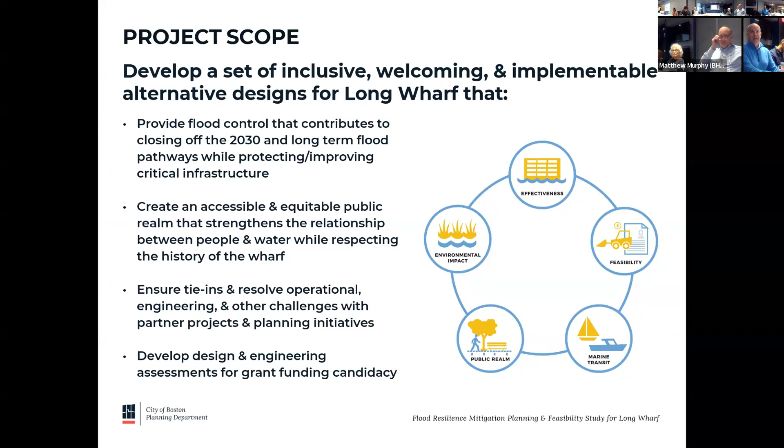And also, what role does our property play in a district scale line of defense? So if we're looking at a district scale flood barrier, where does it occur in our property and when does it get built out?

Our project area is strictly within our property area. To the north, connecting to Columbus Park, and to the south to Old Atlantic Avenue and the aquarium. It also includes the water sheet and all the water transportation infrastructure at Long Wharf.

We're responding to the flood risks, the flood maps. Downtown Boston was vulnerable to near-term flooding, existing flooding and near-term flooding, not just the 2070 long-term flooding risks.

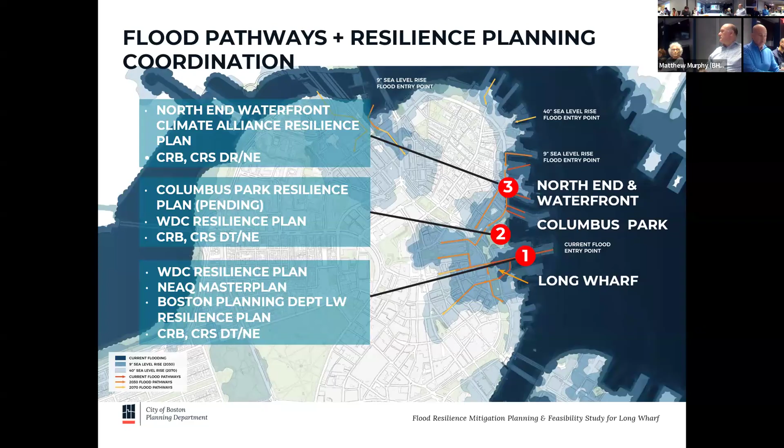We've coordinated our project with the Wharf District Council Resilience Plan, the upcoming Columbus Park Resilience Study, and the North End Climate Alliance Study—all these efforts underway to look at the modeling and determine how high we need to build and what level of design we want to utilize.

This is just a scale of how high we need to build. I'm going to go through a bunch of slides about resilient infrastructure and design. We use John Hancock as our scale, since his counting room was out at Long Wharf in the chart house, and he was about 6 feet tall.

You may recall the floods from 2018—that was about a 1 foot flood depth based on the existing grade. For sunny day high tide, at minimum we want to redesign Harbor Walk to be dry in the future during sunny day high tides, which is about 3 feet, and king tides, which is about 4.5 feet from existing grade. The storm surge—keeping the Atlantic out of downtown—would need to be built up to 6.5 feet above grade. So this is a significant change in elevation. How do we build this to protect the city from flooding but also maintain our connectivity to the water's edge?

Our plan is not just protecting what's out there, but to improve the experience of the public out at Long Wharf. And we've been very busy.

Can you go back to that? I just have a question. Are you saying the one that's next to John Hancock, that's 15 feet?

That's the elevation above. The elevation at Old Atlantic Avenue is like 8.5, so we have to go up about 6 feet. This is the North American Vertical Datum measurement, so it's not 15 feet from grade, it's 6.5 feet to get to an elevation of 15. You'll see elevation 15, elevation 12.8 on the designs I'm going to run through.

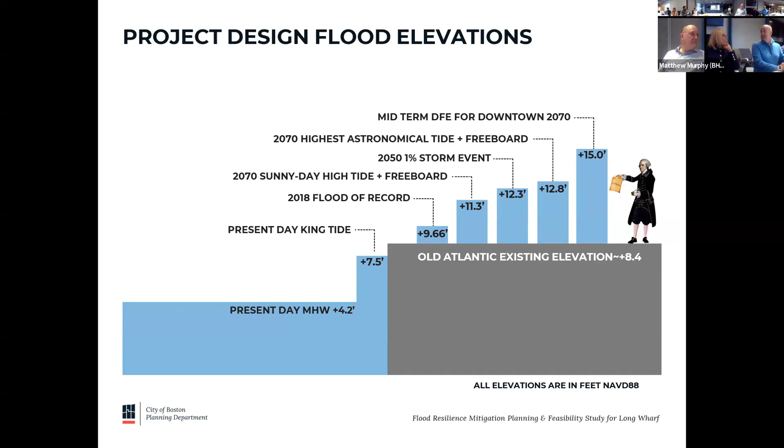And just keep in mind that we're talking a range from 4 feet for 2030 sea level rise projections to the longer term 2070 sea level rise projections—we need to build to about 6.5 feet higher than what's there now.

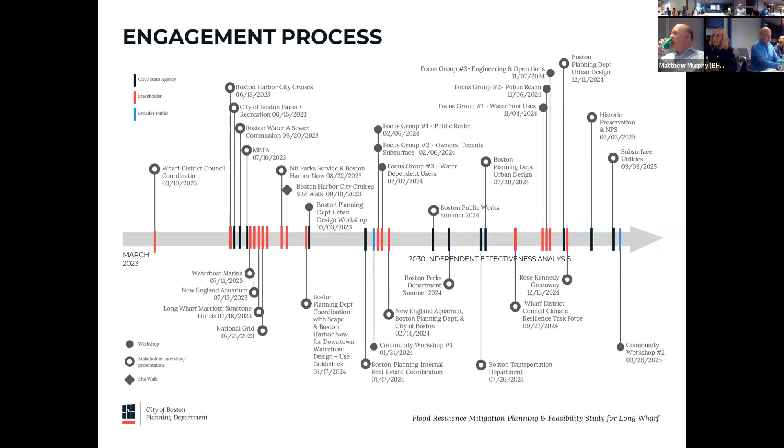Thank you. Our effort's been underway for about a year, 2 years now. We've been meeting with stakeholders, tenants, the MBTA, National Park Service. We've hosted 2 sessions of focus groups and 2 public webinars just to solicit feedback.

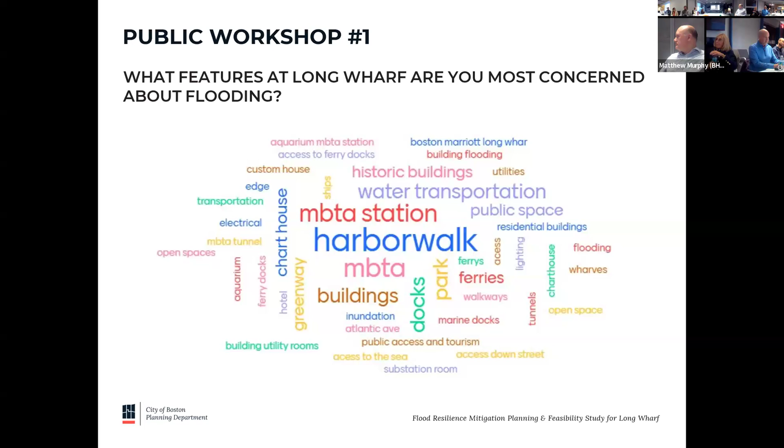In our first public workshop, we posed a question of what are people concerned about for flooding, and Harbor Walk was top on the list. The MBTA, Blue Line Station, water transportation services, the buildings, the historic buildings—numerous things, but this was just to scale for what people responded.

And then, what features would people like to see improved as part of our resilience roadmap—it was raising Harbor Walk, elevating it, shade during the summer months, shade structures, more open space, expanded ferry service, green space, green infrastructure, more public bathrooms. So we picked up on all this input and guidance and integrated it into our project design.

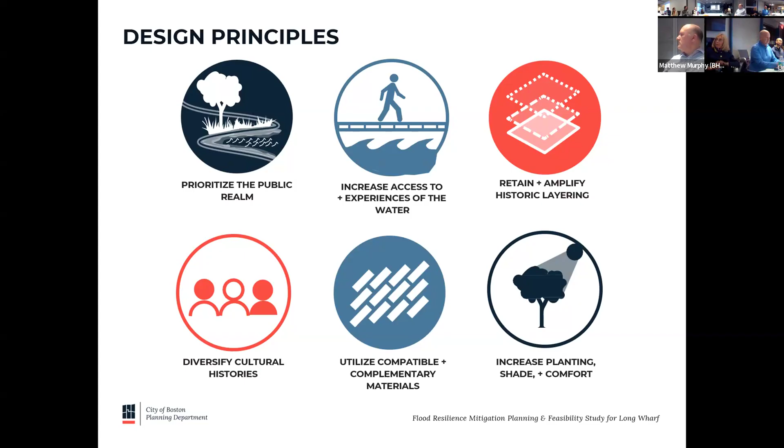Our design principles prioritize the public realm—not just protecting what's out there, but expanding it, increasing access to the water's edge, amplifying the historic layering, the National Register protected buildings, diversifying cultural histories, and utilizing compatible materials. The brick, the granite, the light fixtures—we're not looking to change dramatically the built environment, just to expand it, and increase planting, trees, shade, and comfort for the public.

So our roadmap for 2070 - the city did coastal resilience solutions for downtown North End back in 2020, and we had two alignments that we analyzed. The preferred alignment, option 2, was to build elevations along all the contours of the piers and wharfs. Falling back due to limitations of funding, permitting, and controlling rights of way, we have alternative number 1 that pulls back and allows the wharves and piers to be independently protected, but not part of a district scale line of defense, or possibly floodable.

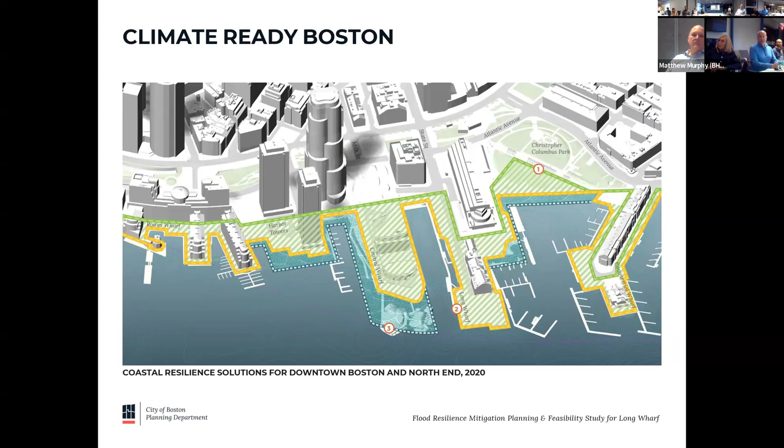That's one of our recommendations for Long Wharf, is that it can flood with coastal storms in the future, but would remain dry during astronomical high tides. So we have two designs that will be fully studied. We're not looking to reach consensus on either of these two - we're fully analyzing, providing the design, the engineering, the cost estimates. I don't think we're at the point now of making a decision since we don't have funding.

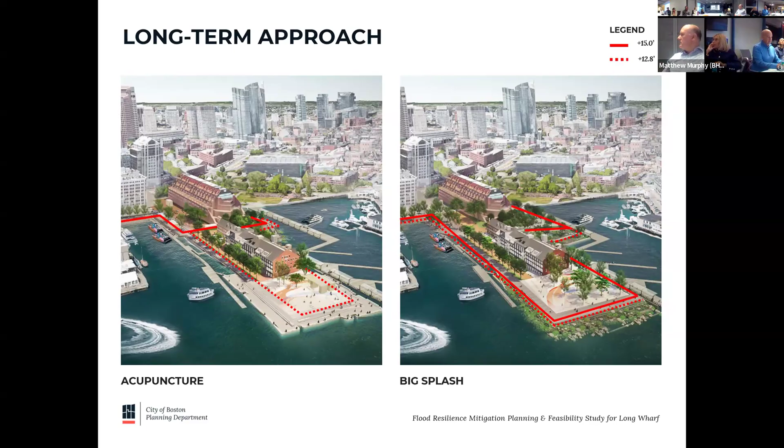We are designing our subsurface infrastructure to accommodate either of these approaches with the weight bearing load of either recommendation. So the two designs are: acupuncture, which has the main line of defense in that solid red line closer to the Marriott, and the big splash, which has that elevated 6.5 foot elevation change around the entire contours of Long Wharf.

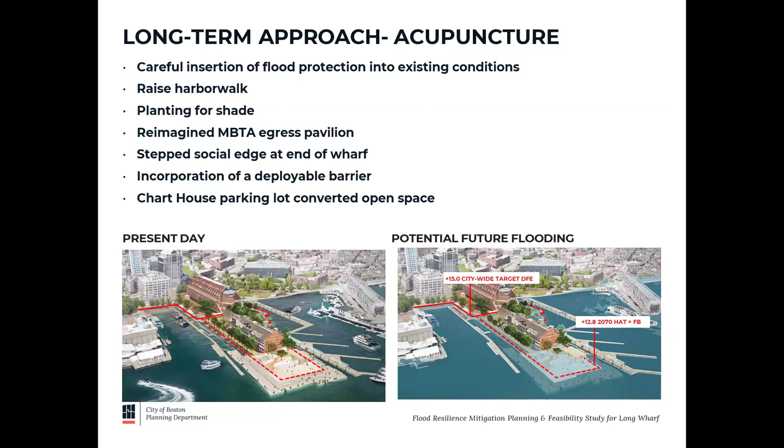Acupuncture is careful insertion of flood protection into existing conditions, raising the Harbor Walk. At a minimum, we want to elevate Harbor Walk to 12.8, which is about 4.5 feet, to put in more planting, to improve the MBTA egress pavilion out at the end of the wharf, to redesign it to be resilient, a stepped social edge out at the end of the wharf, incorporating a deployable flood barrier.

Our main line of defense is inbound of the chart house and would rely on a gate that would close at State Street. The gate would only close ahead of a storm, but that would be part of the district scale line of defense. And the chart house parking lot would be converted to open space, green space.

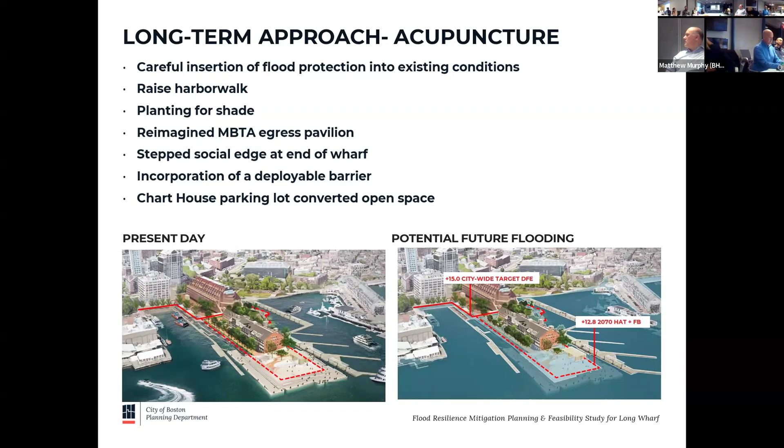As you can see, the image on the right shows areas that would flood with a coastal storm. We have to ensure that everything seaward of the higher elevation is retrofitted and adapted to accommodate periodic flooding in the future. This is a bird's eye view - the solid red line is where the higher line of defense, that elevation of 15, is located, and the dashed line is the elevated Harbor Walk.

In the near term to midterm, that elevated harbor walk will protect flooding for all of the wharf. But in the long term, the storm surge barrier is inbound of the chart house. So utilizing features such as aquarium glass, deployable gates, stepped plazas, ADA accessible ramp systems, raised berms, and landscaping.

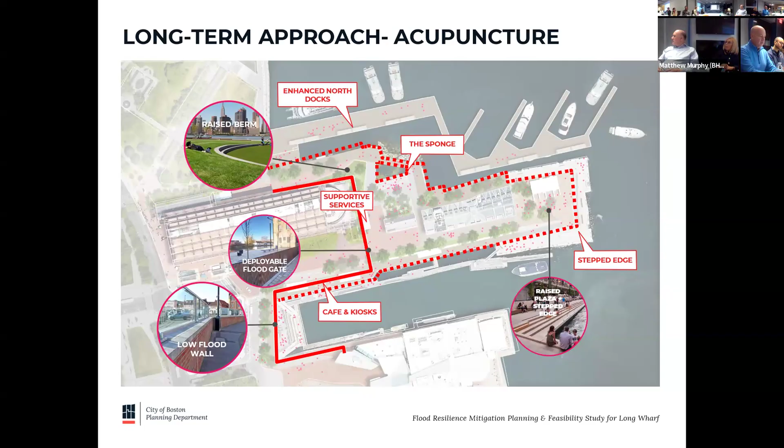We would consider that in either of these opportunities, and I'll talk a little bit about that later in the presentation as to why, and then converting the chart house parking lot to open space.

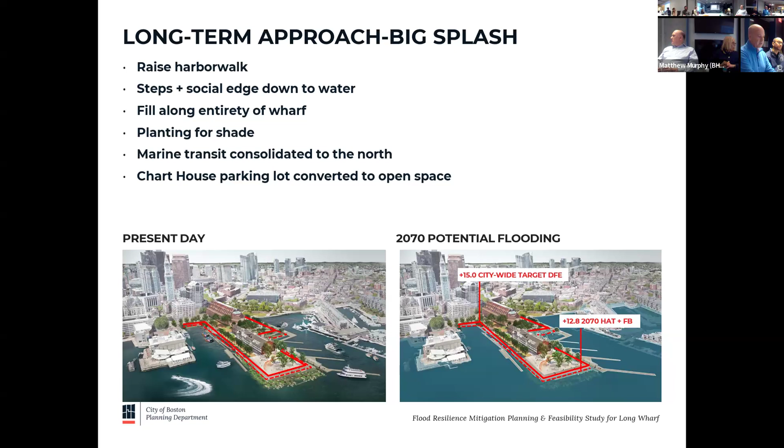This shows that the full line of defense, that elevation of 15, goes all along the contours of the wharf, protecting everything, but also represents a significant height change, which pushes us to do some dramatic landfilling and alterations. It would certainly alter the experience of the custom house block building, in that their first floor would now be sort of an English basement, below grade, and their second floor would be the entrance of the building.

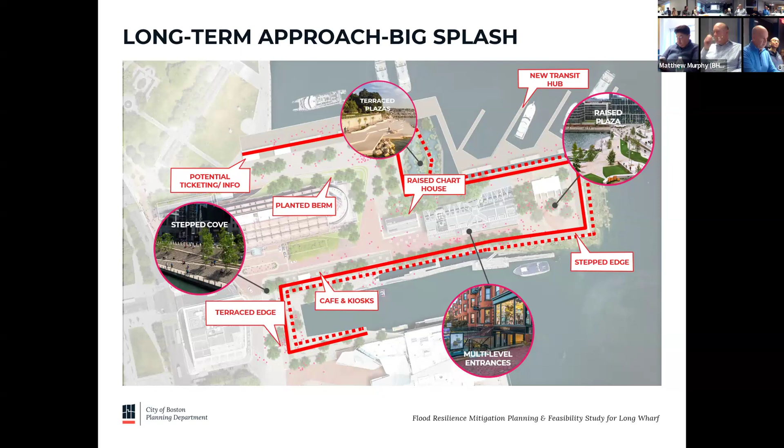So a lot of adaptation would need to occur for that structure and others. We're also going to provide guidance on how to adapt and retrofit all the buildings that could be floodable, with stop logs, gates, and other things, elevating mechanicals, to ensure those buildings can be protected.

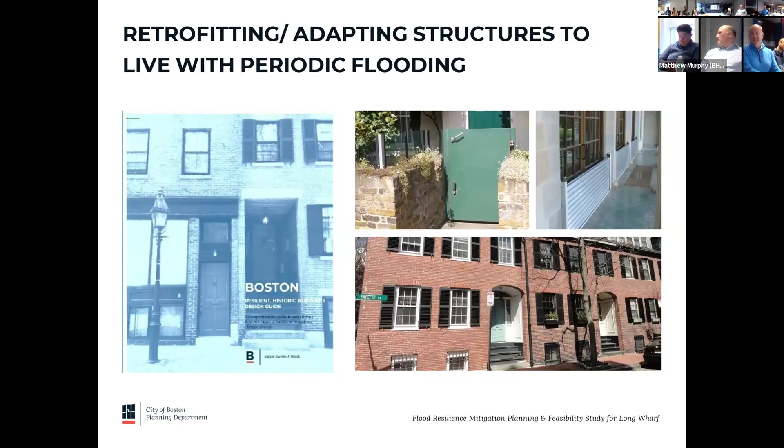We're also proposing, as a bold action item, to do an acquisition of the chart house restaurant and convert it into a public facility - possibly a gateway to the Harbor Islands, a location for office space, storage, and ticketing for the water transportation providers. We don't have the money to do that, but that is our bold item - to acquire it, but also elevate it 8 feet so it's protected in the future.

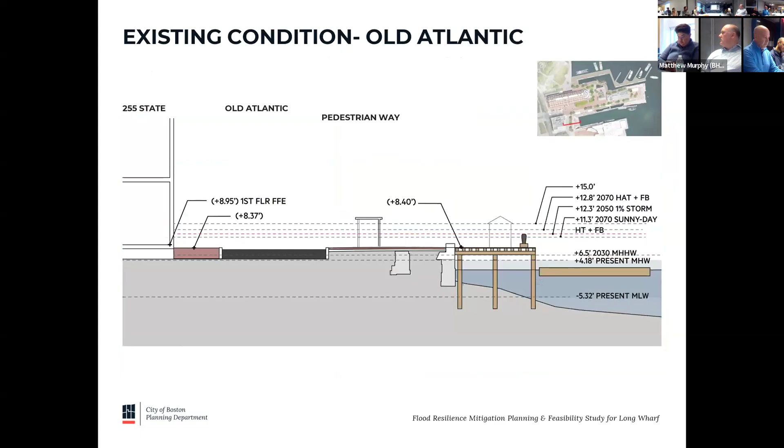So this is the existing grade, and this is how high we would need to build to address that acupuncture design, which would get to an elevation of 15. It would elevate the pier, assuming the water transportation service is still occurring from this location, elevate the walkway, and then you would have ramps and steps down to Old Atlantic Avenue, which would remain at grade.

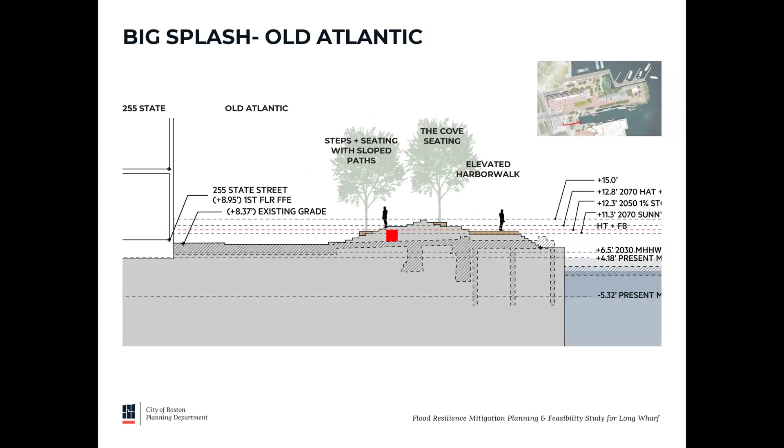Big Splash is more dramatic in that we're elevating the entire street to limit or minimize the amount of elevation that would have to occur at the water's edge, or just have less of a transition. An elevated berm, elevated walkway. It suggests filling in some of the cove to have more space for the public.

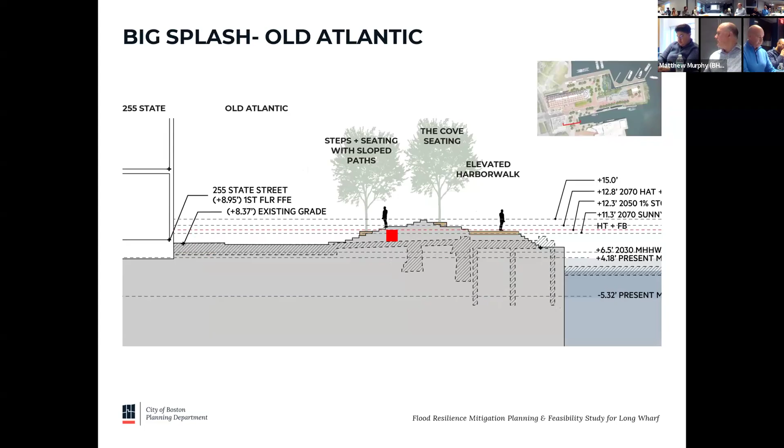I think that was one of the comments we heard, is where does the public convene, particularly during the summers? If we're putting in the elevation changes, are we losing programmable and usable open space? So there's an opportunity to bring in more landscaping, but also more areas for the public to use.

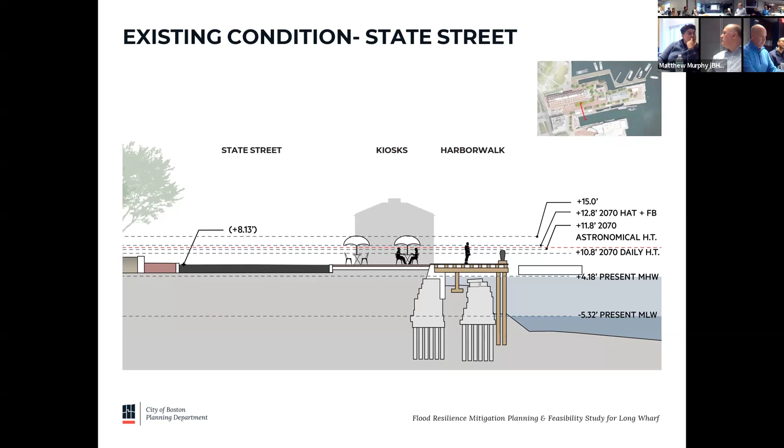State Street, so this is looking east down State Street towards the Compass Rose, and you'll see the water transportation facilities, Boston City Cruises, existing grade. This is how high we need to build for acupuncture, so hitting that 12.8 elevation to ensure that Harbor Walk is dry during astronomical high tides.

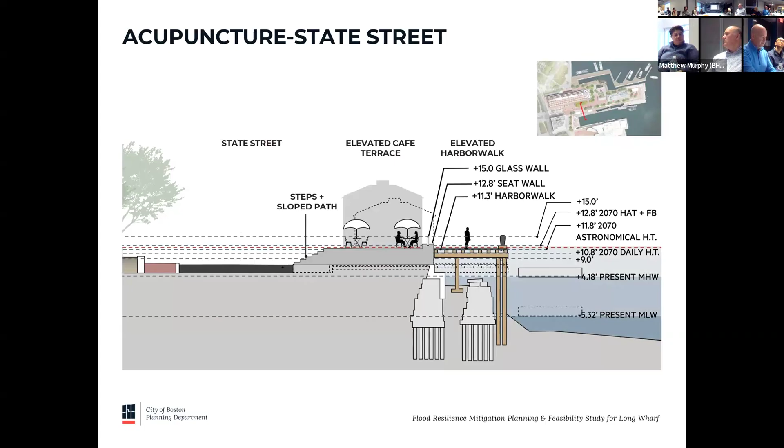So, not a significant transition from grade. And then Big Splash State Street would be filling State Street all the way to sort of the facade of Marriott, or at least to that area.

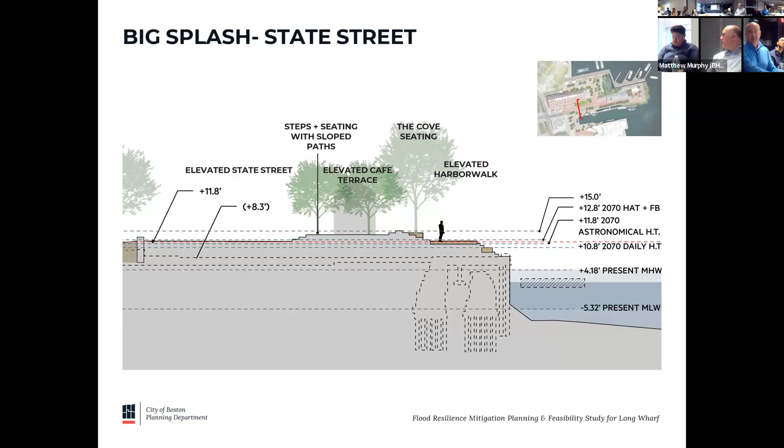So just showing you the transition between the two. Elevating the street comes with challenges such as, do we have to elevate all the utilities that are underneath the street? So these are things that we're looking at.

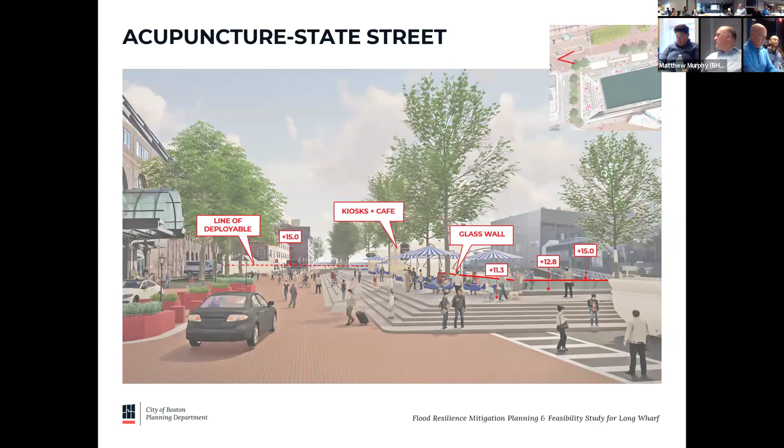So this just shows you the deployable, the elevation of 15. So that deployable gate would be about 6.5 feet above grade. And then just the various elevations of hitting our target goals. The big splash would be hitting that elevation of 15, so 6.5 feet above grade.

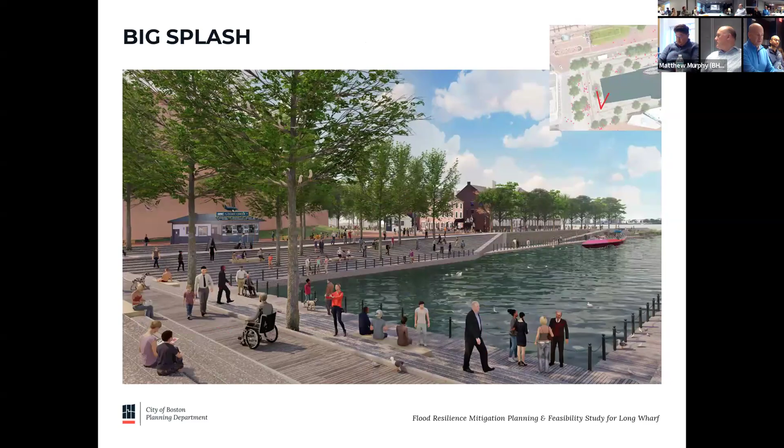And this just shows you how the elevated structures would accommodate a storm surge. This is during regular conditions, and then during a storm surge, this is how the project would accommodate that tidal flooding to hold the ocean back from downtown.

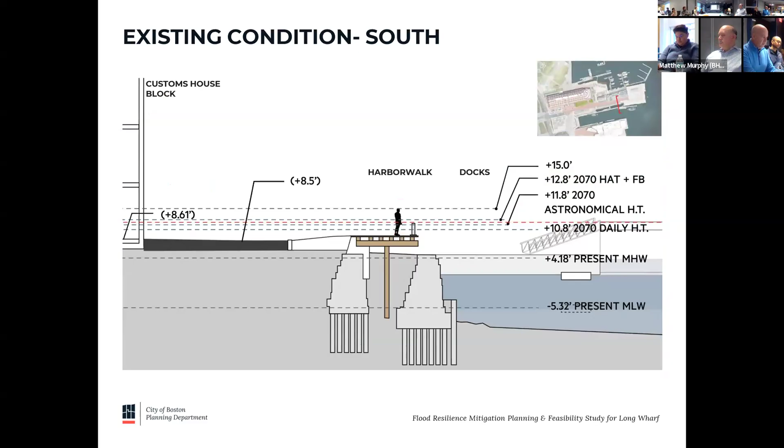And then moving further east on the south side of Harbor Walk, this is the existing conditions. And for acupuncture, this is how high we would need to go. We have enough room to build in a landscape slope, trees that are tolerant to saltwater inundation.

So having your elevated harbor walk so you still feel connected to the water's edge, but State Street at its current elevation.

Big splash, we're elevating the street so that you don't have that dramatic change to a harbor walk, that the roadway is more connected to the water's edge. The elevation changes and it's dramatic.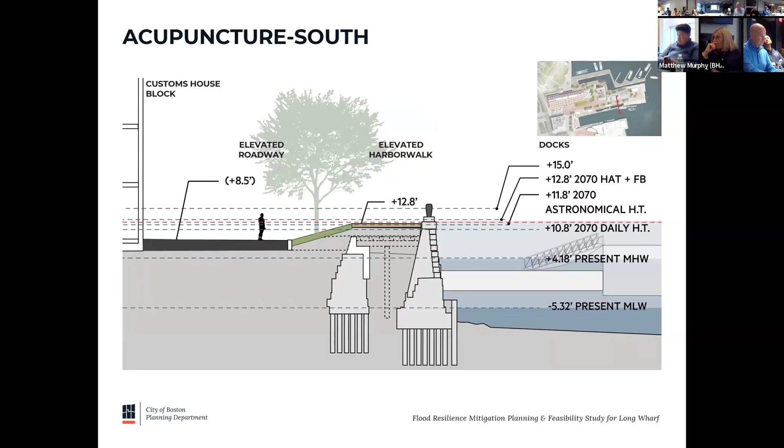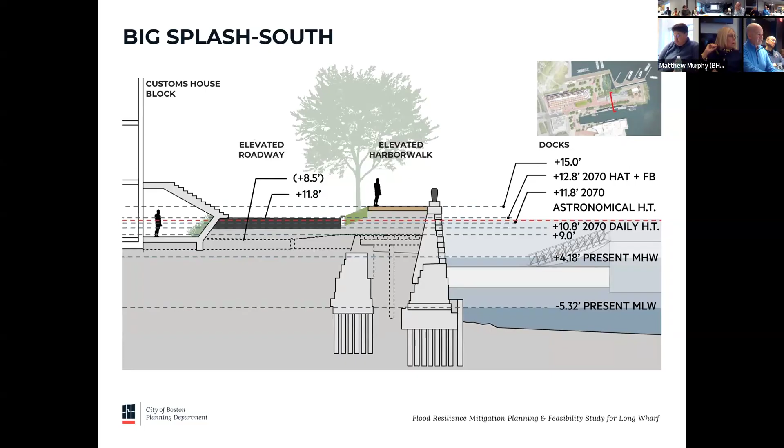But if you look to the left, you have the Custom House block building. This is current grade, the first floor you can access from the street. In this design, you actually can access the first floor or the second floor through stairs up or down, almost like an English basement. When you walk down Newbury Street, you'll see examples of the entryway that's at a lower level than the street.

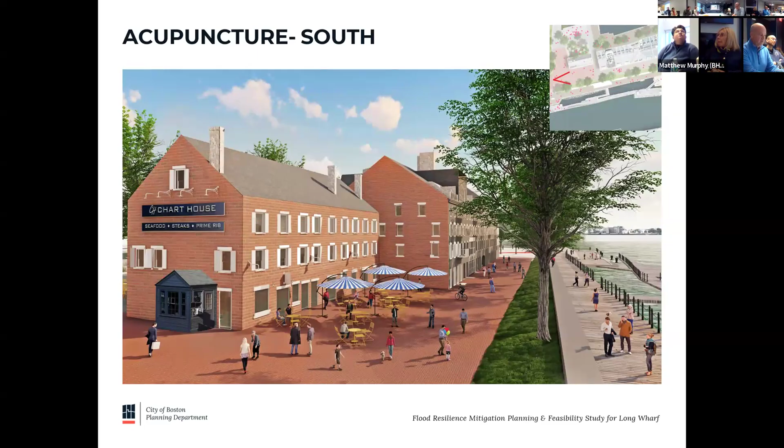This is just an image of acupuncture on the south. We have the flood barrier just on the land side of Harbor Walk to the right, and then a vegetated landscape berm where you can put in trees, and then maintaining State Street in its current form and program with the outdoor seating for the chart house.

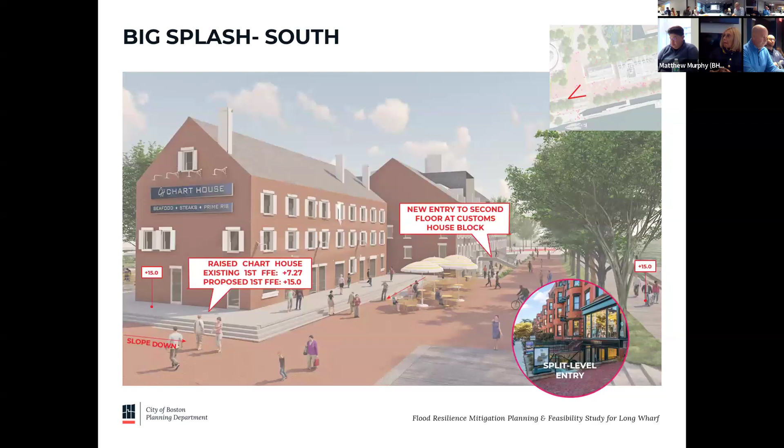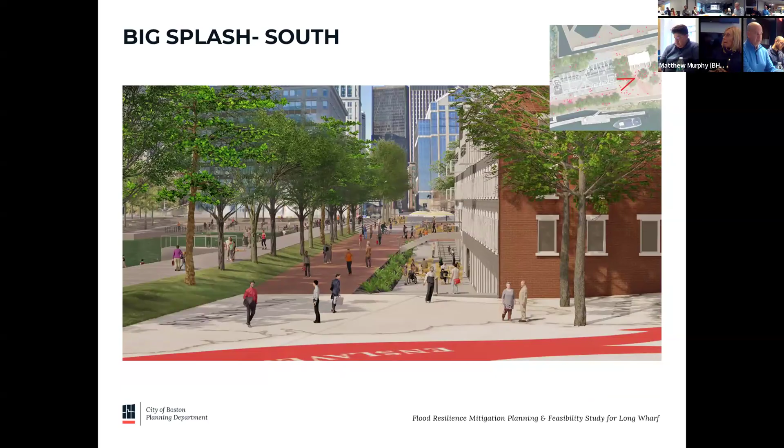And then, big splash — these are the elevations. This is with an elevated chart house, an elevated State Street, and the entrance to the Custom House block building would be below the first floor, with a stairway up to the second floor. This is looking west down State Street, with the Custom House block building on your right. This shows the conditions and how we're able to integrate this elevation change with minimal disruption to people's ability to see and connect to the waterfront.

And then out at the water's edge, we have a terraced elevated harbor walk, so it's dry during astronomical high tides in the future, modifying the MBTA egress building, that pavilion.

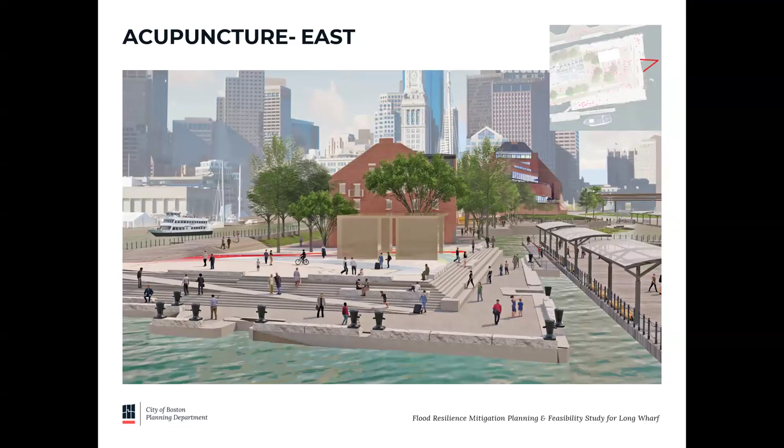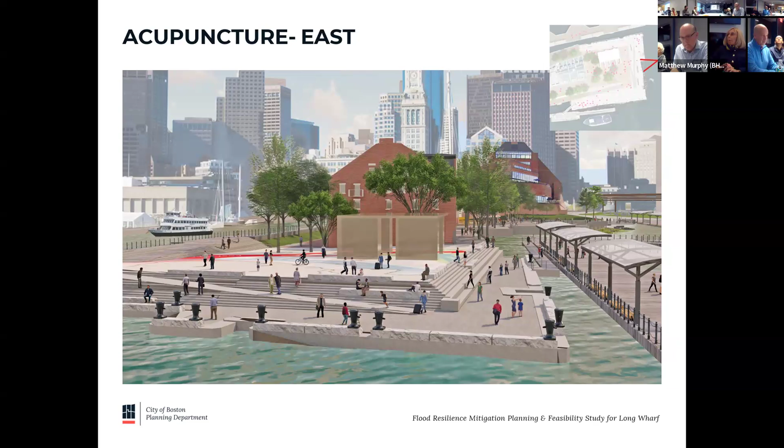Thank you, Rich. So this is the acupuncture approach — this would allow Long Wharf to be floodable during storm surge, but it would remain dry during sunny day high tides and astronomical high tides in the future. So this shows you how it functions. The buildings would have to be individually retrofitted and adapted. During coastal storms, you typically are not out at the water's edge, so the shoreline would be vacated by design. The deployable system would cut off people from their ability to access the water's edge, but this would just be during a coastal storm scenario.

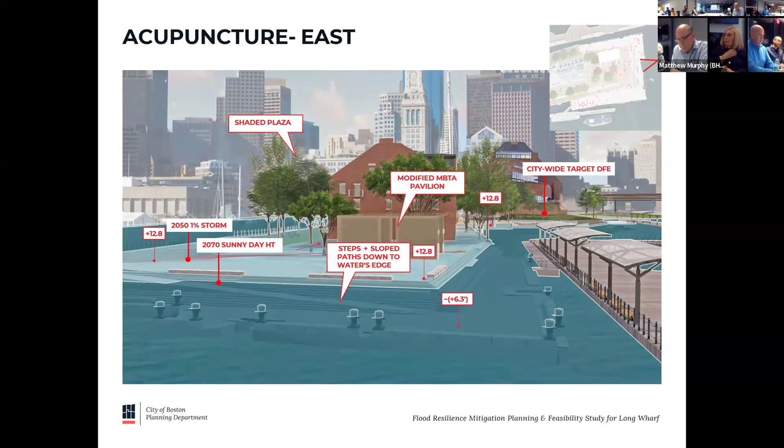For Big Splash, we're elevating everything to an elevation of 15, about 6.5 feet above grade, elevating the MBTA station, putting in a terrace edge on the eastern side of Long Wharf, possibly with nature-based features to add more green space and nature-based opportunities. This shows you how that design flood elevation would function during a coastal storm — the wharf would remain dry.

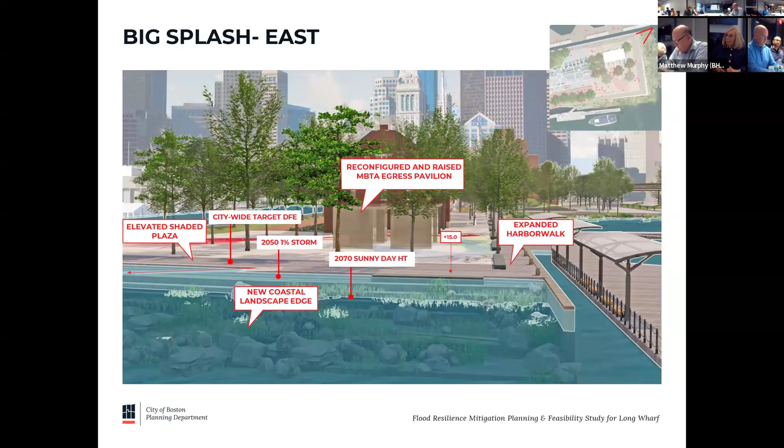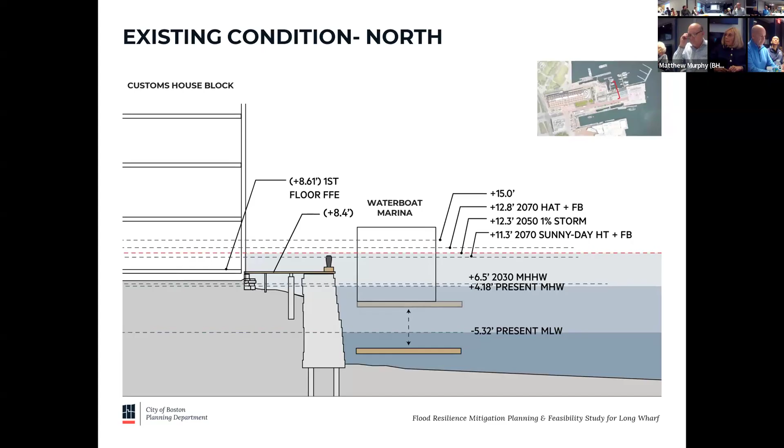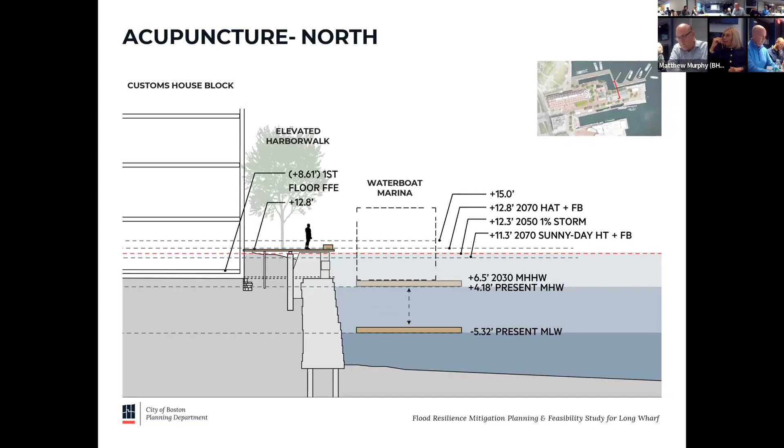And on the north side of the Custom House Block building, we have a really limited right of way. So this shows you the harbor walk and the Waterboat Marina. For acupuncture, we need to build to an elevation of 12.8, building up along the first floor, so any openings to the buildings would have to be closed. We'd have to work with that property owner on maintaining their code certification for egress, and we've been engaged with Capital Properties on these discussions.

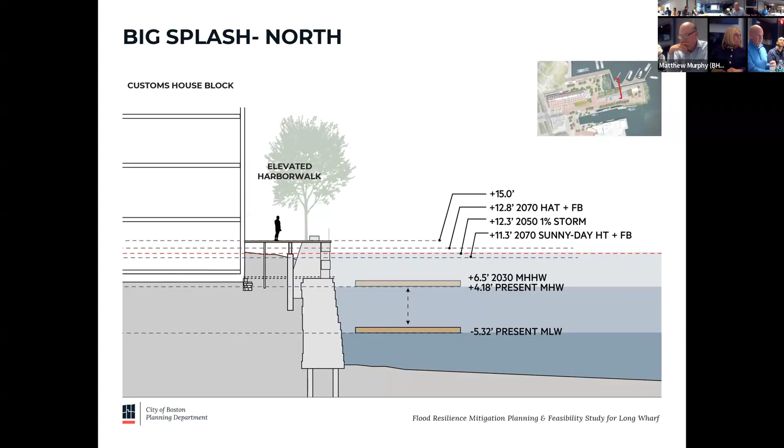And for Big Splash, going even higher, we're pretty much eliminating the first floor access points by building up along the building. You'll notice we're really trying to stay out of the water — our experience with state and federal sea level rise grant programs is that there's discouragement of filling and altering the water's edge. What we want to do, if we get funding, is move projects quickly through the permitting process.

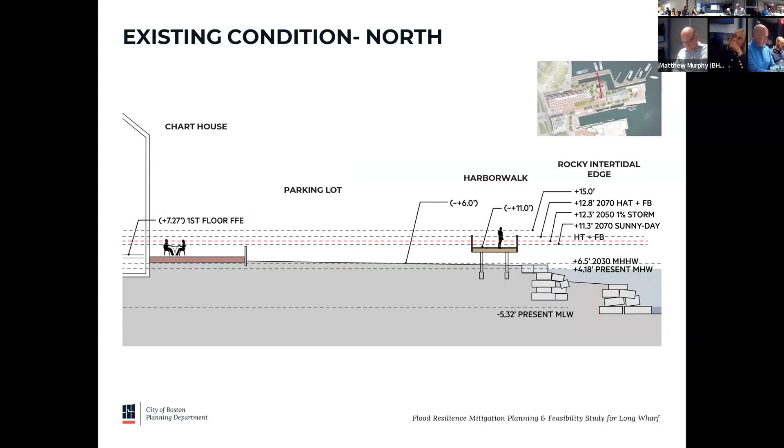Now jumping into the Chart House parking lot — this shows the existing grade. You can see the outdoor seating at the rear of the restaurant, and then the elevated boardwalk that was built as a temporary feature back in the 1990s. I worked on that project, so it probably needs to be adapted.

So for acupuncture stitch, we have an elevated open space, the ability to have a sponge-like feature, elevating the boardwalk so you could actually cross over this intertidal area — having some green-based options there.

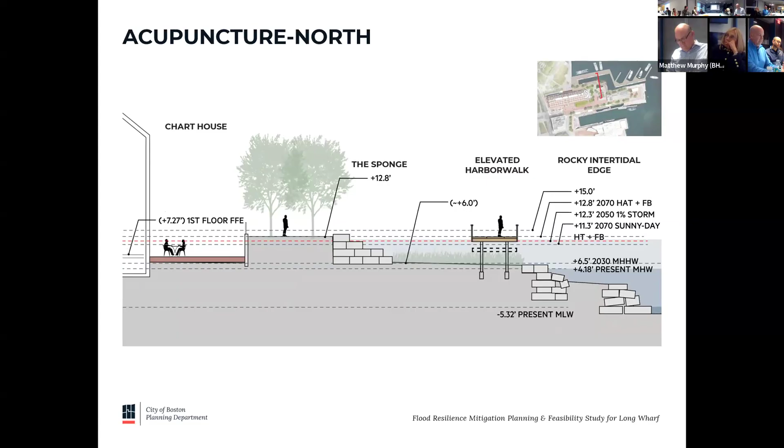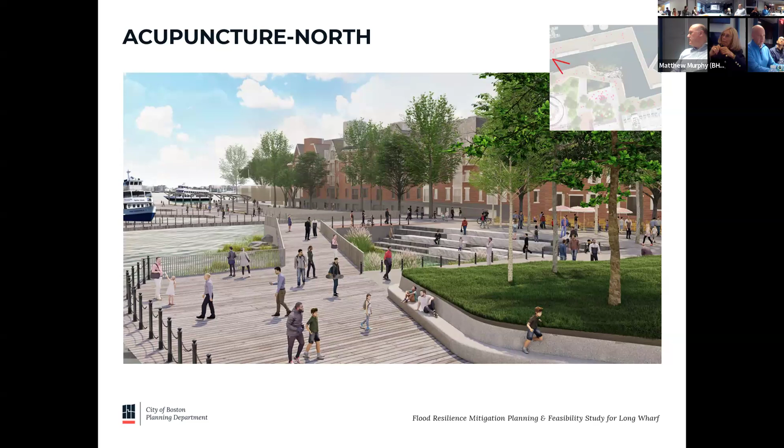We're standing at Columbus Park with the hotel to our right, looking out towards Waterboat Marina and the water transportation vessels, showing how this could be designed with the highest elevation, that berm with a seating wall where the lawn is located. And this shows how it would function during a coastal storm — all of these areas would flood, designed to be floodable, but the highest line of defense would be this berm that would protect the Marriott and tie into a higher line of defense inbound.

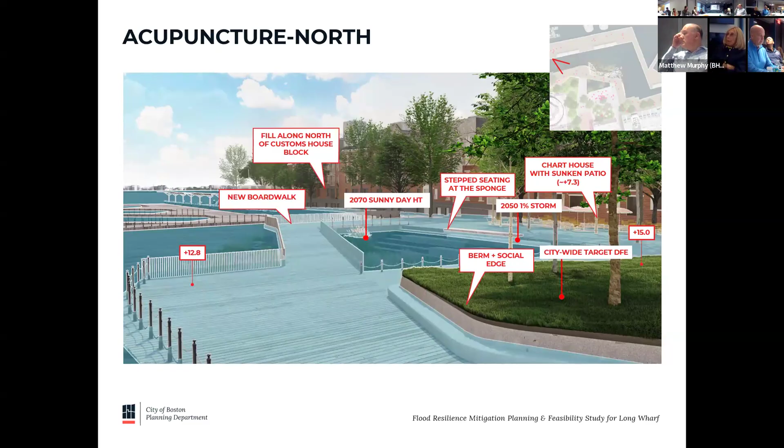And this is acupuncture north, showing what would be floodable as well during a coastal storm.

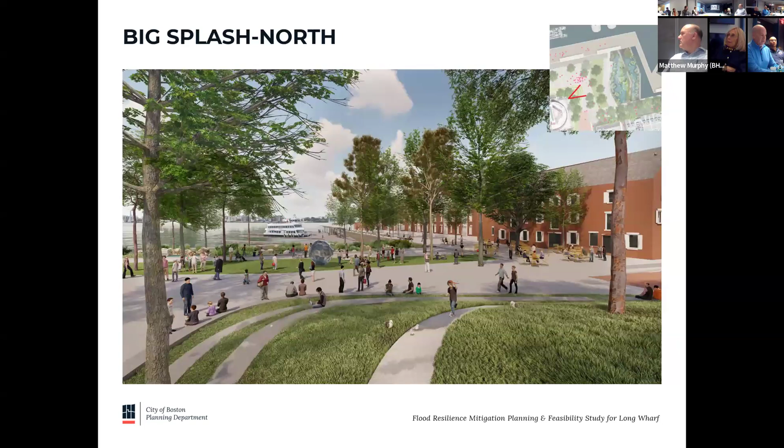And then Big Splash, which would be a new open space, a new parkland designed to connect people to Columbus Park. This would show you how it would function. It would not be floodable, but the higher elevations would be at the water's edge, so that open space would remain available.

So I mentioned improvements to the maritime transit. Why would we take this on now? Well, all of the land-based infrastructure—the ticket booths, the waiting area, the landing, the office space—all that is going to get swept away probably sooner than later. As we're looking at whether we replace these buildings or elevate them, we want to rethink water transportation at this location.

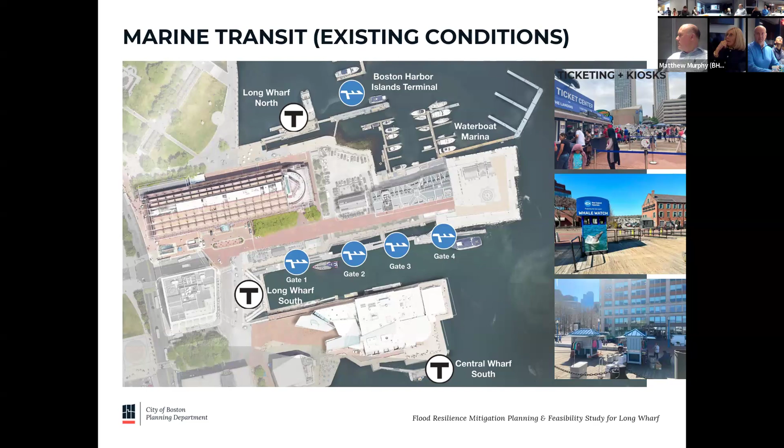The cove between the aquarium and Long Wharf is very tight. It's very hard to maneuver ferries in and out of there. And on the north side of Long Wharf, there are two marinas—one commercial wharf, one a Waterboat Marina—when they're fully occupied, ferries have a really hard time getting into this area and maneuvering their vessels. Also, many of the vessels that service Boston Harbor are not ADA accessible, not bow loading. What we'd like to do is accommodate more dockage for loading vessels.

So our goal is to remove or relocate the marina and accommodate new water transportation infrastructure on the north side. This would also accommodate future service elsewhere. Boston Harbor Now did a great water transportation study a few years ago that suggests more berthing areas.

We were discussing—I guess they're going to shut down the Tobin Bridge when they rebuild it—and they're talking about ferry systems to keep people moving from the North Shore to downtown. You may recall when they closed the Callahan and Sumner tunnels, people relied on water transportation. So we really want to look at opportunities to improve the experience of public scheduled water transportation at Long Wharf.

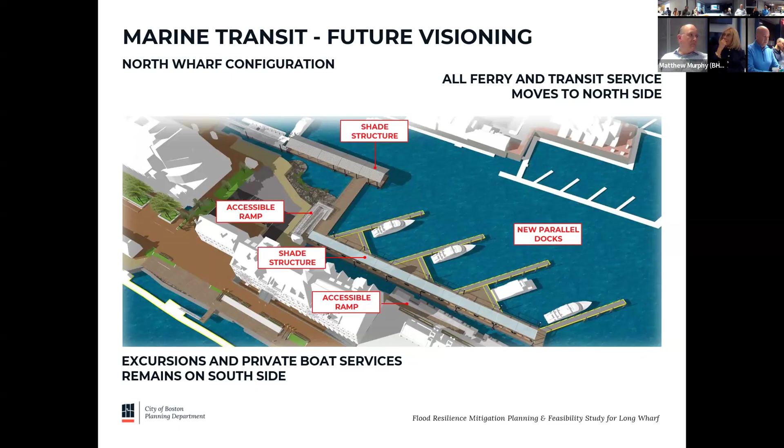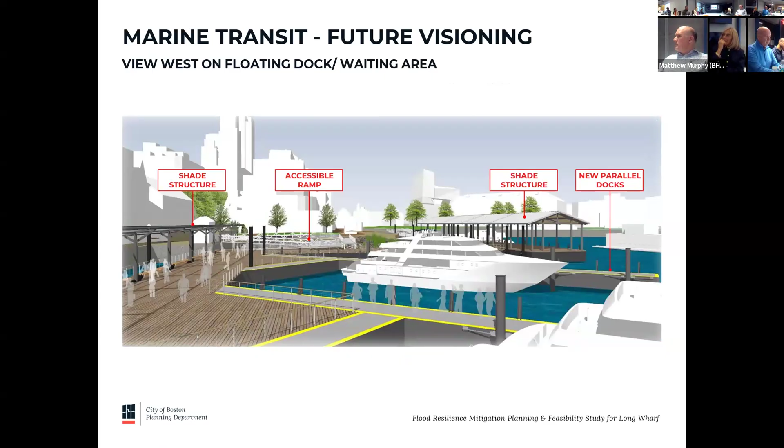It's an opportunity to put out new docks that can accommodate the queuing that now occurs on land, opportunities for shade structures, and just to decrease the congestion that occurs there during the summer, particularly people queuing to get out to the harbor islands. All right, so that was a lot.

Now I get to get to 2030. So I mentioned that downtown Boston is at risk of flooding much sooner than 2070. Probably not by 2030, since that's only five years away and we're not seeing that progression of sea level rise, but certainly before 2050.

And what we did—a little more loudly, please. Yes, thank you. So for 2030, we wanted to look at whether, if we were to make some investments on our property within our project area, we could prevent these flood paths from going into the city.

So we studied these alternative designs for our 2030 flood paths and ran them through a model. This is why this project has taken a little bit longer—we've expanded the scope to look at other alternatives. What we determined was that if we were to build something just within our property area, it would have some improvements.

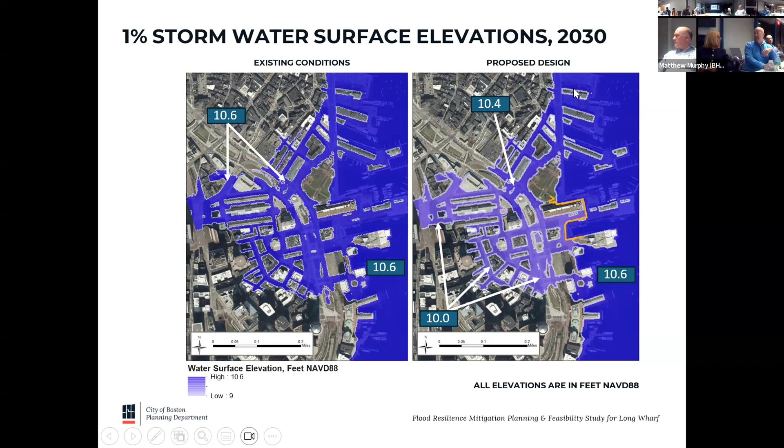One way to open up Congress Street - we've been waiting so long for traffic to go through. So this shows you the right of way of what we could build for 2030, what we designed.

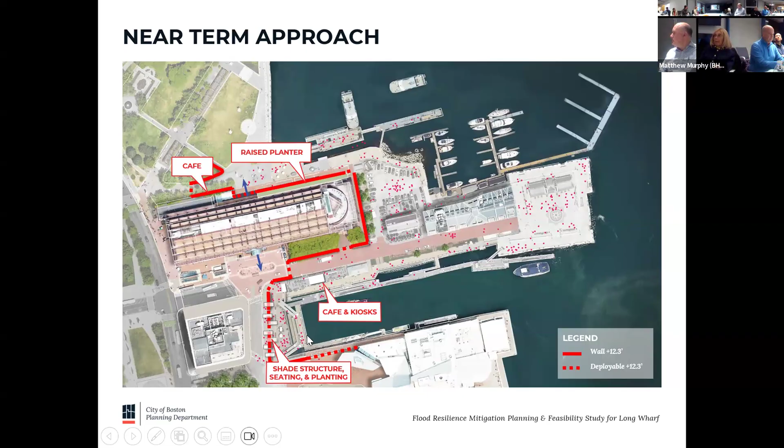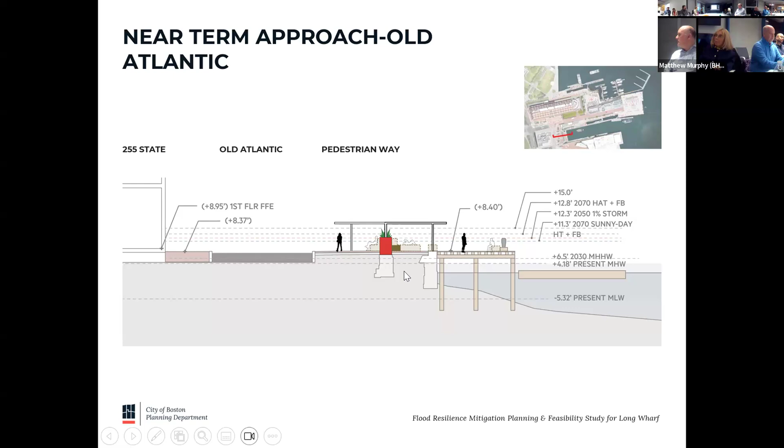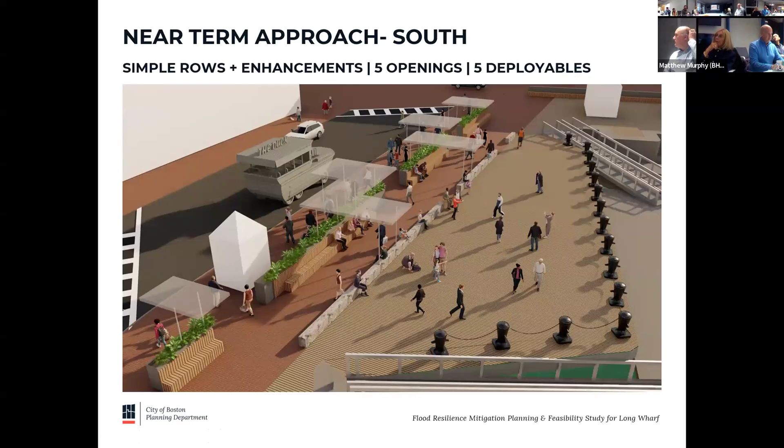So just looking at Old Atlantic Avenue, this is how a design could be integrated into good public realm - it wouldn't be just a wall. What you see in red is our target elevation, how high we need to build, but we could screen it with shade shelters, seating walls, landscaping and other things, while ensuring enough passage from Old Atlantic Avenue to the water's edge to maintain that flow. Those openings would close just ahead of the storm, trying to maintain that porosity of downtown.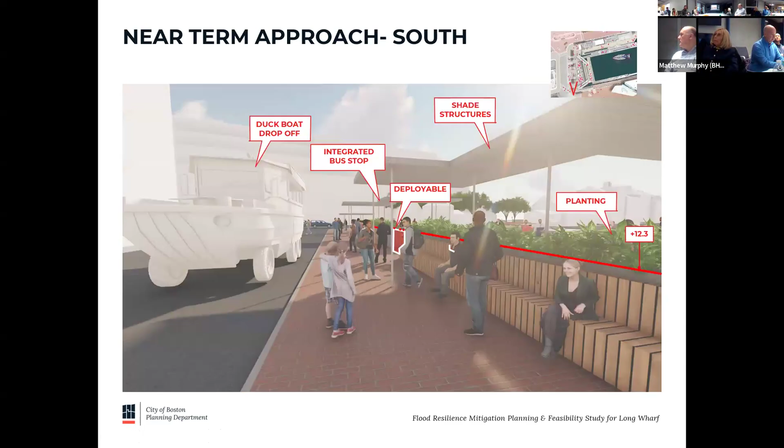This shows you where the duck boats stop on Old Atlantic Avenue, what this wall could look like with great landscaping, seating, and shade - so it wouldn't feel like a flood barrier. And this is it on the seaward side with deployable systems that would close ahead of the storm.

On the north side, this is looking east down Walk to the Sea, with the park to your left and the hotel and Tia's to the right. We would tie into a knee wall on the park side at our elevation of 12.3, with a deployable gate system that would close just ahead of the storm - it would remain open like this until there's a storm forecast.

This is looking west - what's it sealed to, what's it attached to on each side? It's attached to a new wall on both sides. You see this wall here along Tia's. If you look at the railing at Tia's, that's actually how high it would need to be built - that railing gate would be filled in with a wall.

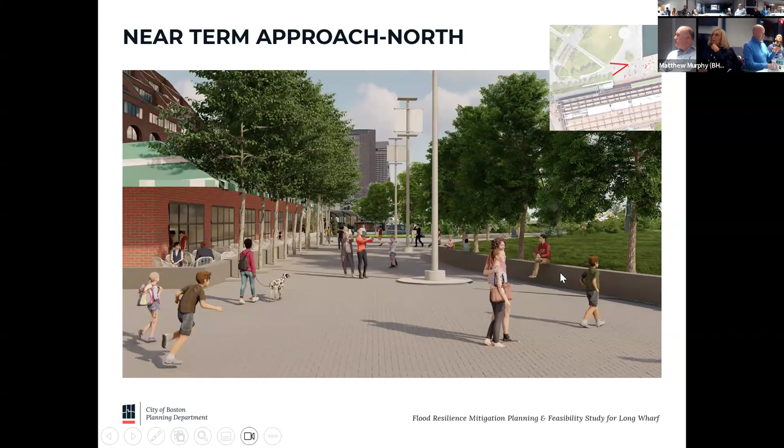And the same with the park - we would put a seating wall at that elevation on the park side, and this is how it would all tie in together.

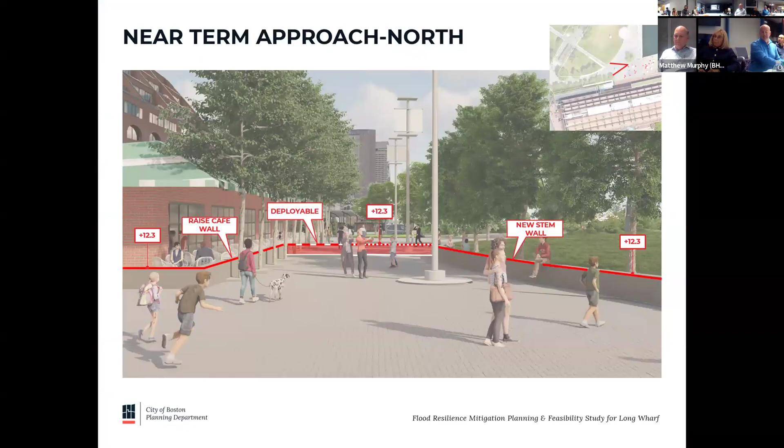We looked at cost - to build that would be about $13 to $14 million, just our piece. And we thought, well, it's not going to buy us a lot of resilience, since the flood paths go around it - probably not worth pursuing at the moment. But at least we wanted to fully design it and continue the discussion into the north end.

With that, the marina transit investment work is just a little over $14 million. The funding source for maritime transit infrastructure could come from the Federal Transit Administration, Federal Highway Administration - they actually have good funding sources. It's possible that we build the water transportation infrastructure sooner than the resilience work.

The resilience work, the acupuncture approach, is about $81 million to build out, and the big splash approach is $130 million, with also soft costs and contingencies. And we're going to build all this great landscaping and parkland - is it on the planning department to maintain it?

We maintain what's out there now, and we would have to make sure that our budget is supplemented to accommodate all these new features, so a pretty daunting price range.

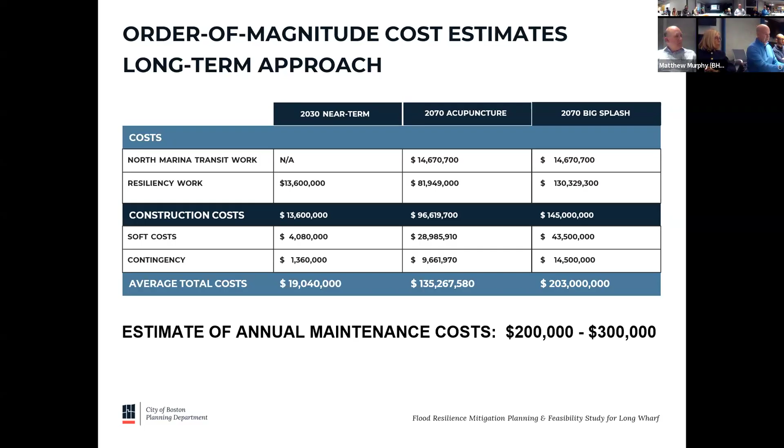Absent funding sources, this is just a list of funding sources we could look to. However, FEMA BRIC was just canceled by the Department of Homeland Security, so that program no longer exists. That program paid up to $50 million a project. We understand that they're probably rethinking the program, and it will likely come back in a different iteration. We just have to be patient. But this year's BRIC programs have been canceled.

This USDOT Protect program is another source of funds we could look to. And then there are also state grant programs, but they don't pay more than $3 to $4 million, so that would just scratch the surface for this work.

So the next steps in our report: we hope to have a draft out soon, which will be published on our project webpage. We'll open it for public comment, and then release the final document. The Parks Department will probably be kicking off a resilient Columbus Park design sometime this fall. Our Long Wharf extended 2030 design work will also start in the fall. And then we'll just continue to seek funding. Yeah, that's it.

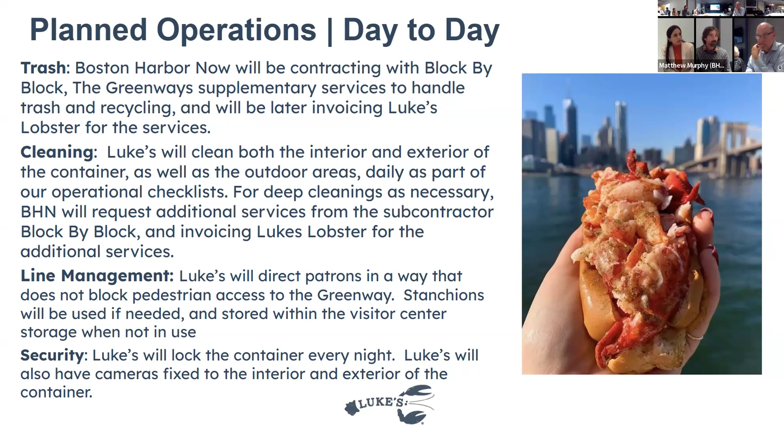Wow. Yeah, and I'm sorry, with the just, I'm trying to, okay, so I'm looking across Marketplace Center. So it's behind that side of Faneuil Hall Marketplace, and the view right now is like if Tia's is behind you, then that's your view, within Faneuil Hall. Thank you.

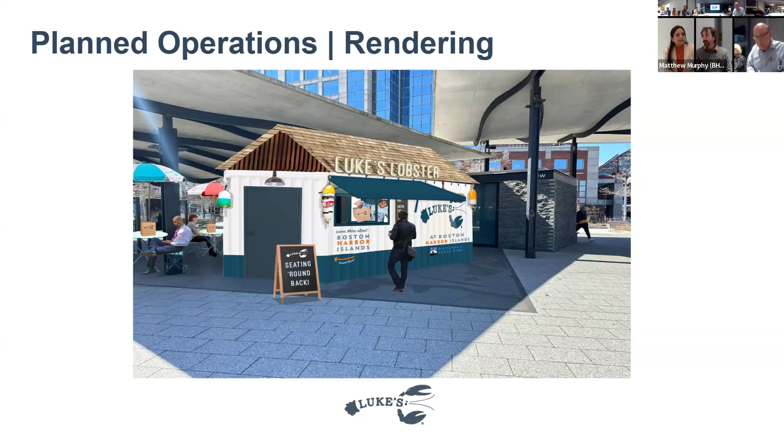Oh, that's it? Yeah, great. So that's a little bit about the business, and we can definitely entertain any questions, comments, or concerns people might have.

I have a question regarding the tables and chairs. You'll be providing the tables and chairs so people get their food and can sit? Yes, but you don't have table service. They can sit, anybody can sit, they'll be open to the general public, but our team will provide, clean, and take care of them. They'll be open to anyone passing through the welcome center. What happens at night? We will lock them up and keep them inside because we've had safety issues in the past, so we're definitely mindful of those. Anything that's not secured will be locked up at night, for sure.

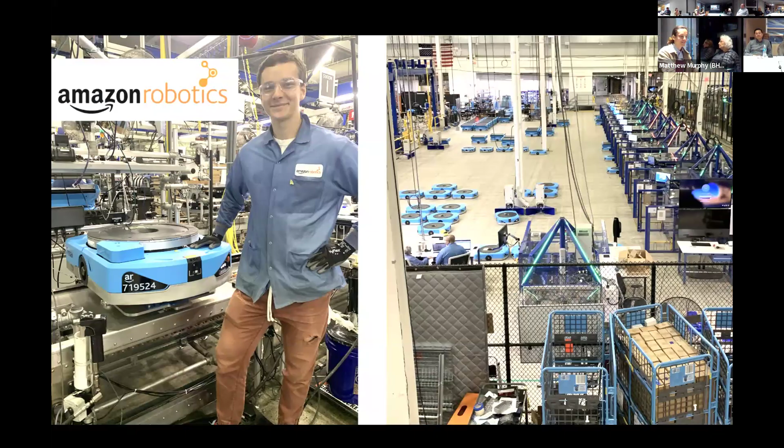And it being the pandemic, and frankly, there not being a lot of people to talk to as I moved to this new city, I was fascinated to walk around the streets and see all these plaques and read about all the incredible things that had happened literally outside my doorstep. So stuff like the Big Dig, the filling of the Back Bay. And I thought, wow, it's so incredible to appreciate all this and see our present environment in the context of other things that have come before.

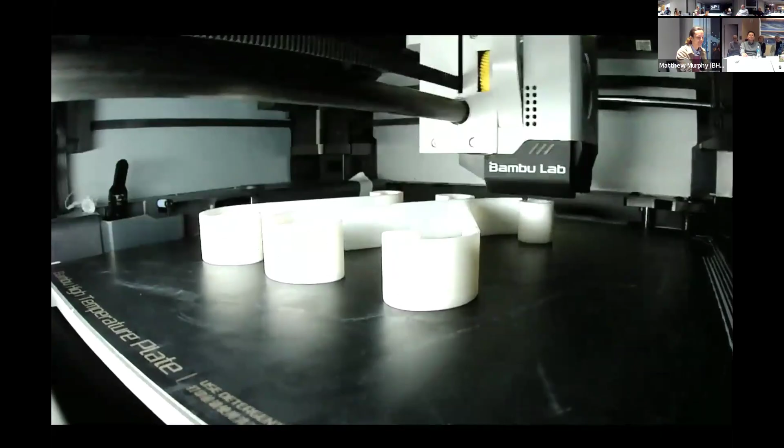These are actually all designed by myself using my computer modeling skills and 3D printed using hardware that I have. So if anybody ever randomly needs something, I'm happy to be a good neighbor. If you have stuff that breaks and you need random replacements, I can help you in a pinch.

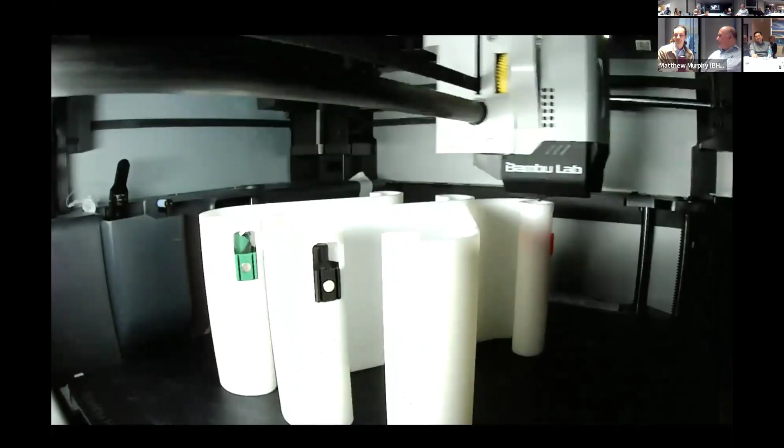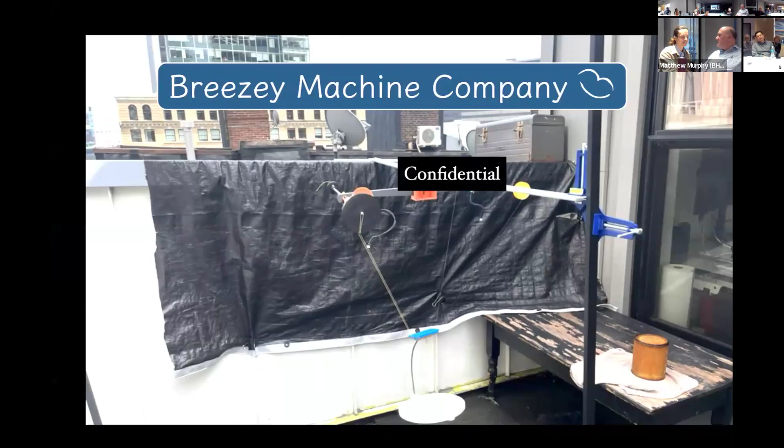Part of the reason I started Scroll Strolls Tours is I moved here to work for Amazon, and I've always wanted to try this American dream of starting a company. I'm actually trying to bootstrap something in the machine design automation space, and this tour business is a great outlet to practice public speaking skills, and all those things they don't teach in engineering school, while also maintaining a little revenue to pay the wonderful rents in this great part of town.

Right now I have two incredible tour experiences that are quite different from each other. The first one I call the Building Blocks of Boston, which starts with the founding of Boston and seeing it built up over 400 years. The other offer I'm calling Seaport Scores, a much more social experience, and I'm inviting everybody here, businesses and residents. I'll be hosting a public tour for free, just for us to get to know each other better. Even though I might be a little younger, I probably know or at least have seen some cool photos and content about this great neighborhood of ours.

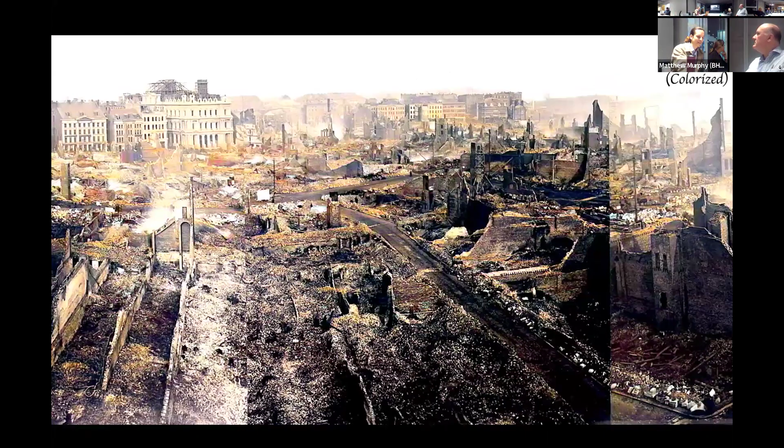And then the Big Dig, and then Seaport Scores. This is what I'm inviting everybody to come out onto. This is an appreciation of our great waterfront, which we have here, and an exploration through a few cultural challenges.

Everybody is going to be given a little mini whiteboard during the activity, which is nice because it also functions as a name tag for folks who don't know each other. This is the way to score points through a few cultural challenges, guessing games, just fun little activities to engage with the wonderful things that make Boston great. I think folks have a ton of fun with this. I actually made this tour from customer requests for a more engaging, more social experience, and I'm really excited to share that with the neighborhood.

And again, lots of photos and fun stuff to be shared. You can sign up for a ticket - again, it's a free tour, but I appreciate advance notice of the reservation so I can know how many people to expect, because there are a few little giveaways and goodies I like to give people to enhance the experience. This will be Sunday, April 26th at 1 p.m. The start point is in front of the Moakley Courthouse in Seaport at 4 Northern Avenue, and the tour will end right here at this great, beautiful dome at Rowes Wharf.

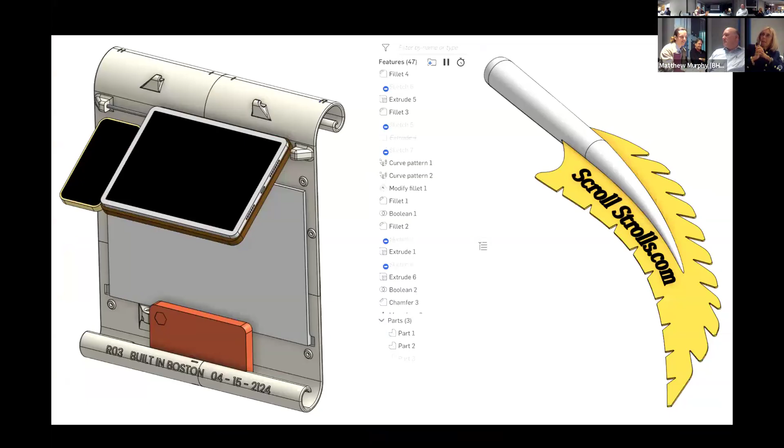Do your tours show these fabulous photographs? Yeah, the photos are shown on the mobile display that I carry around, and I'm actually working on a bigger one, though I don't have a photo of that ready yet. I want to make sure people are able to see this stuff, and I also share a file with some of the colorizations, so even after the tour you can still appreciate and reference them.

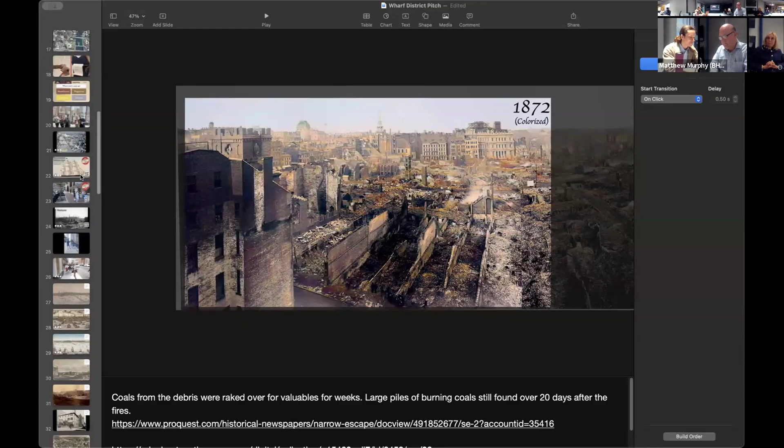I can't say I was super creative. It was actually originally called Behold Boston Tours, that's what I started as last year, but folks seemed to not remember that name. They'd say like Beyond Boston to me, so I figured, well, I carry this big scroll around, kind of like a mobile display. So honestly, if you think of a better name for this, I'm open to it. But for right now it's Scroll Strolls, I got the domain for the .com, and that QR code also works.

How are you getting traffic to your site? Right now it's a mix of TripAdvisor, GetYourGuide, I'm a partner with Meet Boston, the city's tourism board, and a little bit through the sparse social media I've done. Definitely open for suggestions for improving traffic.